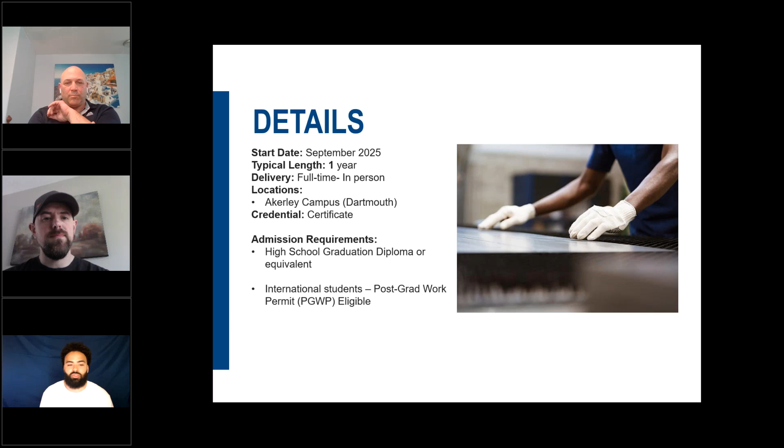The floor is yours. Hello everybody, I'm Willie DeBay, and this is Ian Bouchon with me today. Basically what we're going to try to do is give you an idea of what the actual sheet metal program is. We're located at NSCC Akerley campus. The program we're going to talk about is a 35-week program, 30 of the weeks are in class, and 5 are work experience, which we usually have set up for the students. So we're going to give you an idea of what sheet metal actually is. You want to add anything there, bud? No, not really, it's just a great course, and I really enjoyed my time at NSCC.

All right, so the first question is, what is sheet metal? Basically, if you go into any building, there's ventilation in the building, okay? That ventilation and all the components that are installed, we actually install that and do that work. People hear sheet metal and think that we just work with sheets of metal every day. There's a small percentage of people that work with sheets of metal every day - those would be the shop side of the trade, and then there's the installation side of the trade. So what do we actually do? We bring air into the building from the outside. That air either has to be heated up or cooled down. It has to be filtered, and it has to be humidified or dehumidified, depending on the requirements of the building you're actually working with.

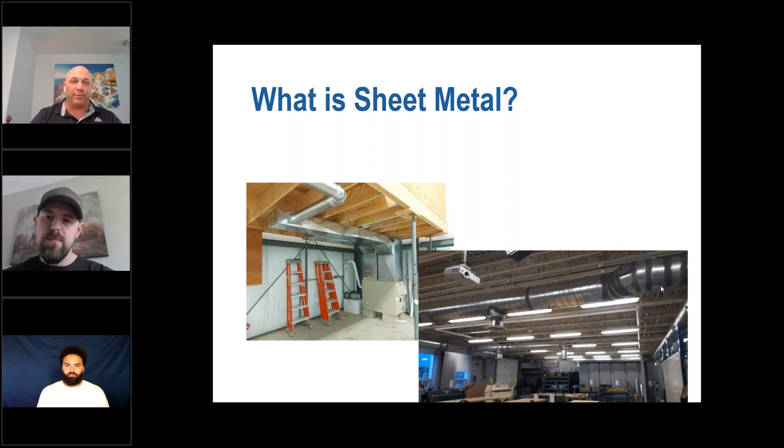Ian, do you want to add anything to that, because you've been out working a little bit with the installation, so I think you might want to add a little something. Yeah, I have been working out on the job doing install for over about a month now. I guess the picture on the left there with the ductwork system, that's the stuff I'm doing every day basically. I'm running off, plenum off the heat pump unit basically, and then I'm running all the lines that are going from the outside to the inside and throughout the unit.

Like we're building an apartment building, for example. So yeah, I'm doing this stuff every day, basically.

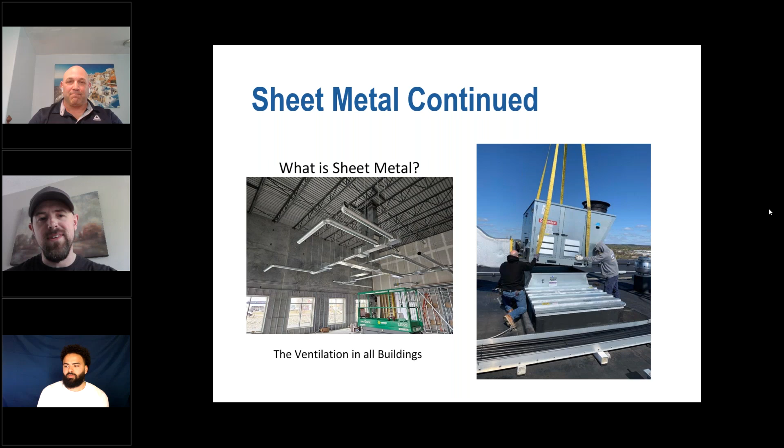This right here is just giving a little bit more of the installation portion of the sheet metal. It's showing you a duct line, and then an exterior where we're putting cladding over piping that is on the outside of the building. The idea of the cladding is to protect the actual pipe on the inside. There'd be some kind of insulation, and then copper or aluminum or something along the outside, and it'd be watertight so the weather never gets to it. So that's for the further installation.

Now we're going to talk a little about the shop side of the sheet metal. Our trade is a little different than a lot of other trades. Most trades, you go to the manufacturer and just pick up whatever components you need. Our trade, you can do that with some of the stuff, we do have some stuff that's manufactured, but a lot of it is custom made for the actual project you're working on. So this is what you have to learn - how to actually make different types of components, different fittings, in the actual shop.

As you can see on the right, that's the Atlantica shop, and it's a really large shop. They have a coil line machine there. Basically it comes out almost like that - they put the TDC on the actual duct, put the corners on, and then it's done. So it's a nice, easy process there.

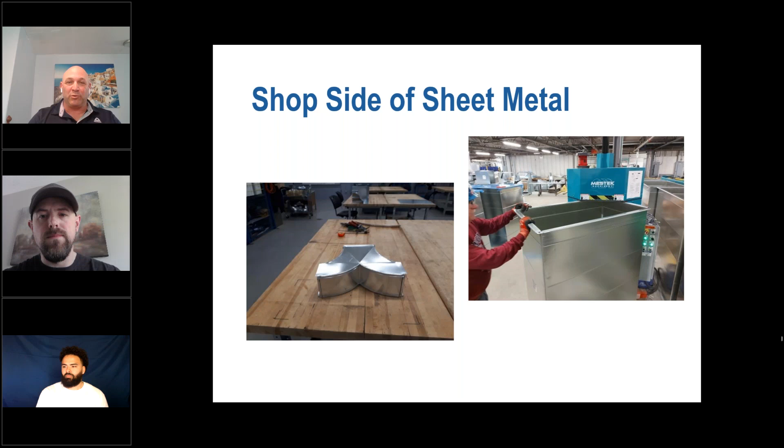Not all shops are pushing like that. A lot of the stuff you'll learn is what we'll do in class. We'll actually learn the process to make the actual ductwork.

You want to add anything to that, since you actually got to do it in class and everything? Is there something you want to mention?

Yeah, I did. The stuff we do in class is very similar to what you're going to experience when you're in the shop. I spent a few days in the shop before I went on the job doing install, and all the skills I learned basically went right to work my very first day in the shop. So it translates really well from what we do in class to what we do on the job.

Ian was an elite student though, so every student's a little bit different - some people find the transition a little easier than others, I just want to say that. But yeah, we will go through a lot, and most people will actually have a pretty good understanding of what we're doing when we're in the shop and in the installation side of things.

So the next thing we're going to get into are the basic courses we actually do in our program, at the sheet metal systems Akerley campus. We'll start with safety and rigging, tools and equipment, power tools and equipment, pattern development and layout, fabrication fundamentals 1 and 2, introduction to air handling, metallurgy, welding and cutting process, and math and applied mathematics. There's also communications, which isn't on there, but you will get into that as well.

You want to mention anything you really liked, what your favorite was of these courses? I think everybody really liked the metallurgy. Of course welding is a lot of fun, and we spent a pretty good amount of time on it, and we do some pretty fun projects with it too. I think everybody really enjoys that one, and soldering as well is a lot of fun.

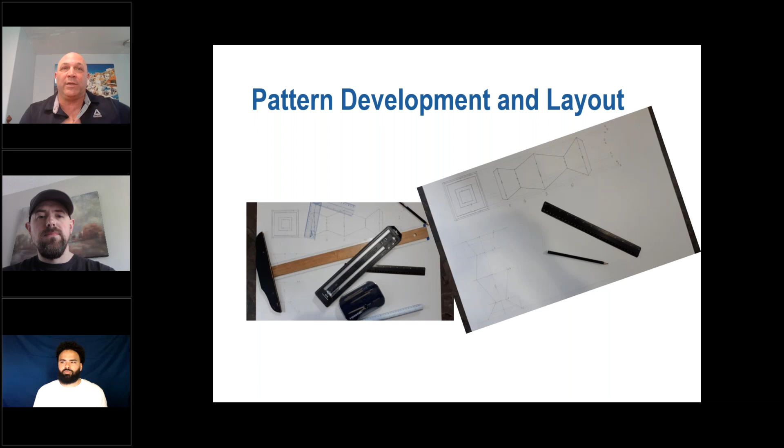Definitely. Okay, so I guess we'll get into the fabrication fundamentals. We'll be doing fabrication fundamentals in the first and second semester. There's all kinds of different fittings that we use.

I'm just trying to think of the materials that we mainly use. Galvanized is our main material that we use, and we do a little bit of black iron or mild steel, if you want to call it that. Either one would be fine.

And we make all kinds of fittings. We make like rectangular 90s, change 90s, transitions, OG offsets, OG change offsets, Y branch, take offs, square to rounds, round reducers, transitional 90s, rectangular 45s and 90s. But basically, we do all kinds.

And there's different projects that we do that are pretty cool. We make like a little tin man, which is pretty cool using these projects. And we made a town clock last year. Since we did the project with skills and with the banjo, I think I'm going to actually try to put that in instead of the town clock, so people can do that and see the architectural side and have a little fun with it.

Because we're just trying to make it so it's not the same thing again and again, and give people different challenges. What do you want to add? Do you want to add anything about the fabrication fundamentals?

I will say the scale is going to be different. When you get out working on the job, a lot of the time the fittings we make are smaller because we're in the shop and we're learning. But when you get out on the job, the fittings may be like 10 times that size, depending on the application.

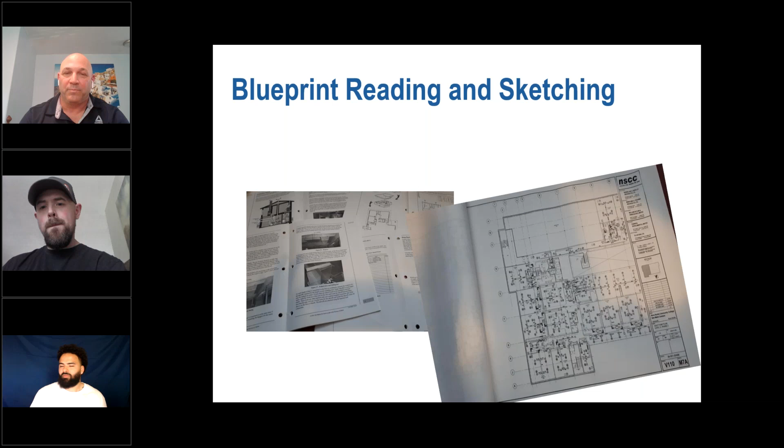So we're looking for pipe and different fittings and stuff. It makes it easier to learn, and you catch on pretty quick. It does seem a little hard at first, but it's not too bad once you get into it. I think we covered that pretty good.

Okay, so the introduction to air handling. I like this section because of all the different components that are on the job - VAV boxes, termination boxes, silencers, any kind of ductwork, 90s, transitions, coils, all this kind of stuff. You have to learn about what they are and how they actually affect the systems, and the different filters we use.

We'll get into the basics of that, and then on the job you'll see what they actually are. With this part of the project, we have an installation we do that is a mock-up - we go to the oil burner section and actually do a rough-in for an actual house.

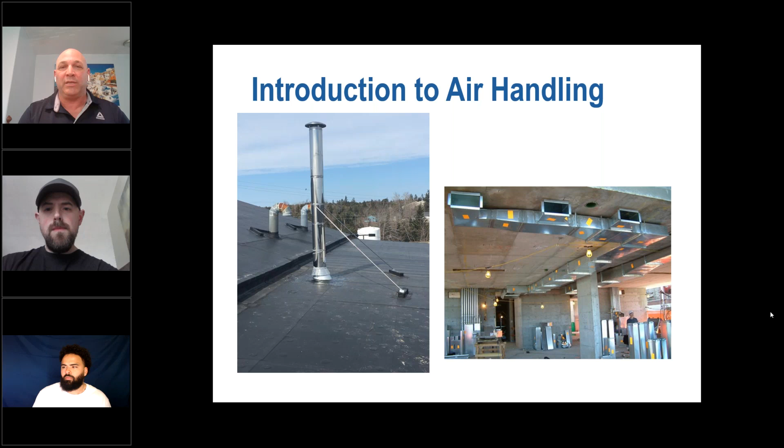I think the students really like it. It's a nice project, and it actually gives you more of a hands-on feel for how all the joints go together and how they actually fit. You can show that to someone, but until they actually do it, I don't think it means as much until you get to do the installation side of things.

Anything you want to add with that, Peter? I would just say, yeah, 100% right - once you get in there and get your hands on it and actually see how the systems work, it makes a lot more sense. The system we put together in class is very similar to what we're doing on the job for the units I'm working on - basically the same idea, a small residential kind of setup.

You're working with heat pumps right now, are you, Ian? Heat pump with the rectangular duct coming off it with a plenum attached to it, basically like what we have up there, with takeoffs for your grill boxes, and then a supply, return, and exhaust air line as well. So we go through the basics to give people an idea of what it actually is. I think it usually goes fairly well.

Okay, so we'll go on to the next slide. The next slide is metallurgy, welding, and cutting processes. So basically what we do is start with the metallurgy. We get into the ferrous and non-ferrous metals, and how to see the different gauges that we work with. In general, it's about 30 gauge to about 10 gauge, usually about 1/64 to about 1/8.

Do we use more than that? Yes, we do, but in general that's about what we do. Different metals that we use, we'll talk about them and see how they're gauged. We'll get into galvanized, mild steel, stainless steel, aluminum, copper, brass, all that kind of stuff. You'll learn about that, and then we'll get into the welding.

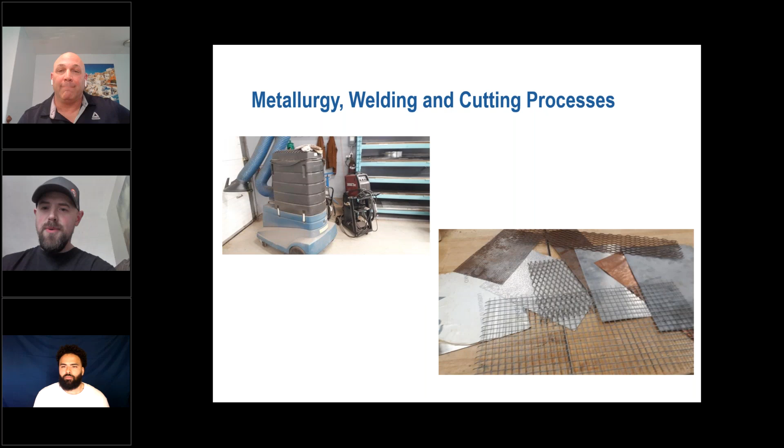It was a lot of fun doing the welding, and even in the shop they do a lot of fabrication too. So they might be making booths or exhaust booths for a lab or whatever, and they're welding it all together. So potentially down the road, as you get more into the trade, you'll get more experience doing it, and they'll trust you to do more complicated welding jobs as you go.

Yeah, we're just giving you an introduction, so you know what it is, and hopefully you're comfortable with it when you get into the world and are out on the job. Because let's face it, a day or two of welding isn't really going to make you a welder, but at least it gives you an idea of how to weld, the process, and how to weld the fittings together and everything.

All right, so now we're to the math and applied mathematics. I'm going to mention this. So basically in the first semester we have basic math. With the basic math, you get decimals, fractions, perimeter, area, volume, conversions, trigonometry, that kind of stuff. So we'll get into those basics.

I find most people, because we kind of make it relevant to things, are fairly good with the math. It's not like it's overly hard math, but if you really suck at math, this is probably not the course for you to take. If you're okay with math, then I would say you'll be fine for this.

In the second semester, we kind of get into it and apply the different math that we do. We do stretch outs, we'll do things like apex height, slant length, pattern angle, chord length. Basically we'll try to apply it. We'll go with cross-sectional area, how to maintain cross-sectional area. If you've got rectangular, round, or square, how to get that size and how to maintain it. Basically, that's what we do.

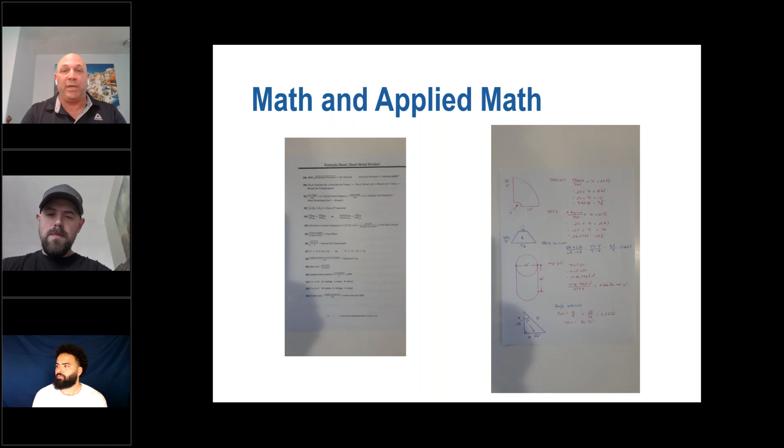We apply the math that we did in the first semester, and then we show you where you're actually going to use it on the job. You can actually see a couple examples in the picture here. There's the formula sheet on the left, and then there's some of the math we do on the right.

And anything you want to add about this? Because I know you actually did pretty well in the math course and everything. You did.

Going in, you were a little bit nervous, and I think a lot of people are like that. But if you apply yourself, I think you'll do fine. I mean, you did quite well. I think you just don't get freaked out by it. Everybody's in the same boat. You're not alone, so help each other and stuff. It's not super hard to understand, and Willie explains it in a really good way. And he's always there too to answer any questions you have.

I wrote some notes down, and I wrote morning math with Willie, because I was always ready for usually Monday morning, and that's a great time to do math. I know it sounds horrible. Do it in the morning and get it out of the way. Usually you're sharper in the morning and it's better. That'd be my advice anyway. I agree with that, doing math with Willie.

I like the math one because in our trade we can show you where we're going to use it. I think when people go to school, they learn some of this math and they're like, where the heck am I ever going to use it? What am I learning this for? But with our course, you're actually seeing where you're going to use this. Even the trigonometry, there's ways that we can actually use it on the next job site.